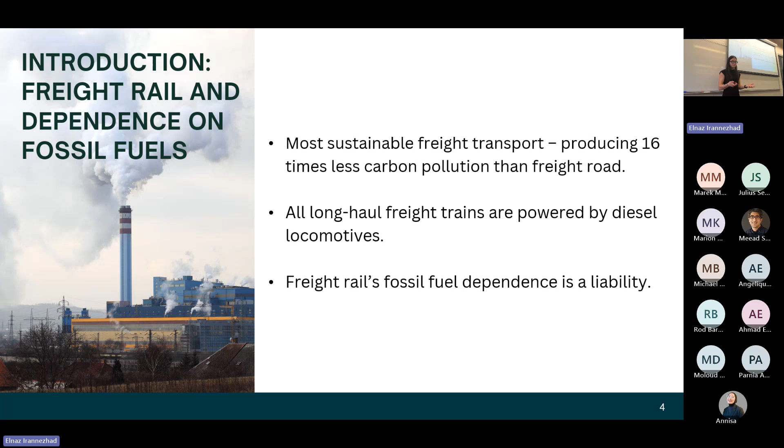And that is where battery electric freight rail comes in. However, just like your Teslas, battery electric freight rail must be charged along its journey. We need to create infrastructure along its route to allow the batteries to be charged or to be swapped. But how exactly do we do this in a feasible way? So this is basically the crux of my thesis.

And in order to answer this question of how do we create these stations in a feasible way, two things must be done. We first need to determine the energy required by the train to traverse along a particular route. So an energy consumption must be modeled. And then from that energy consumption model, we can provide that energy in an optimal way.

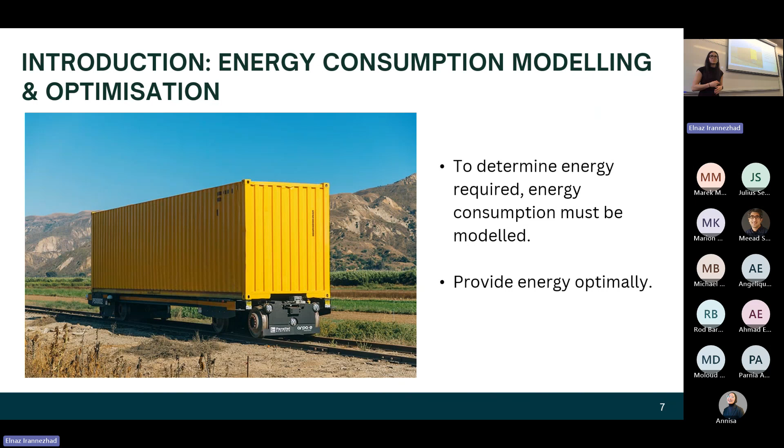So in order to develop this energy consumption model for my thesis, I analyzed three main energy consumption models currently in the literature. So these three main ones were the ones that I thoroughly looked at. All of them use the modified Davis equation, which is an equation that is, I guess, foundational for all energy consumption for trains. The first model looks at diesel trains and is validated on US data, and the second model uses an electric train and is also validated on US data. The third model, however, is slightly different. It does look at electric freight rail, but once again is validated against US freight data.

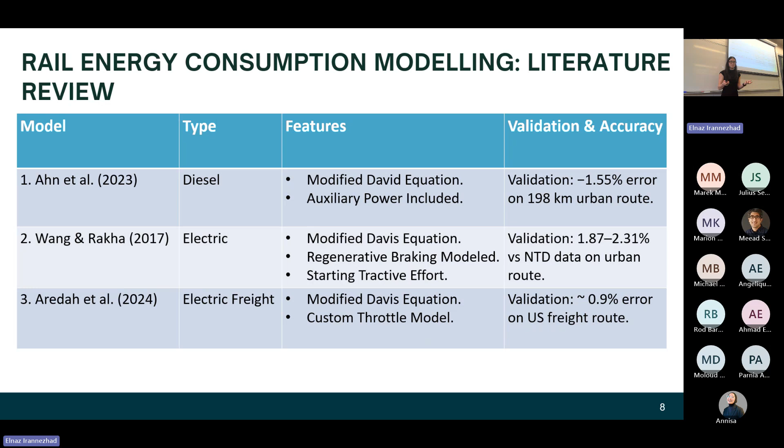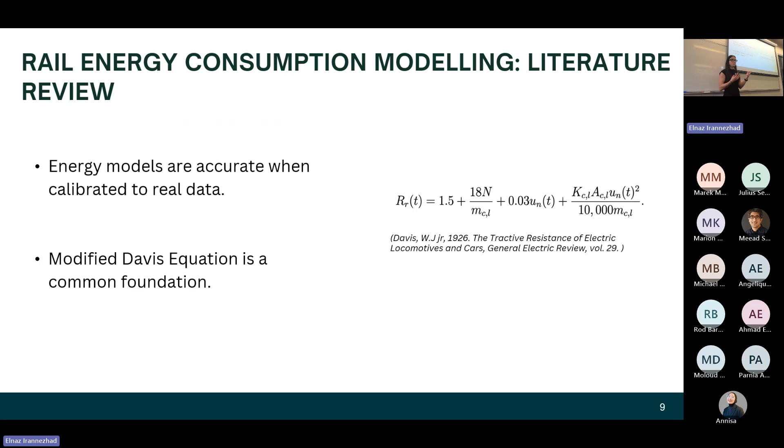However, although we have three relatively good energy consumption models, there is a gap in the literature, particularly when it comes to Australian freight electrification of rail. So the first thing, there is a lack of freight-specific battery electric modeling. The first two models didn't look at freight-specific rail. They looked at passenger trains, which have different energy consumption demands compared to freight rail. The third one, however, did look at electric freight rail. However, it used this customized throttle parameter, which limits its applicability to all different types of trains. That's an input that's quite difficult to find for every single train.

Secondly, there is very limited literature when it comes to focusing on how do we create charging infrastructure for battery electric freight trains. There seemed to be very, very little literature on that at all. And then finally, there were no energy consumption models that were tailored for Australian freight routes. And as one of the papers that I did read showed, variations in climate can really change the energy consumption demands of a train. So having a model that is tailored for Australian freight routes is really important, and that's something that we hope to close the gap on.

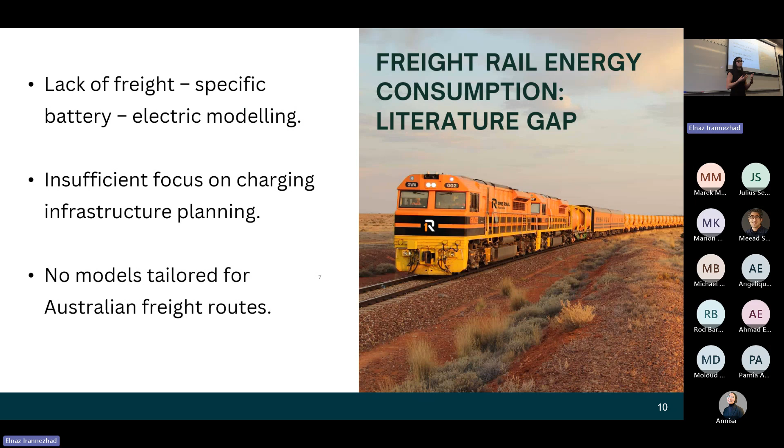So what does my thesis hope to contribute? Well, first and foremost, I hope to contribute a battery electric freight-specific energy consumption model. And the output of this model will then be passed into an optimization algorithm that Dr. Jia Guo has created. With these two models built, my energy consumption model and the optimization model, they have been combined into a tool to help guide practical infrastructure planning and inform decision-making for charging and swapping of batteries.

Then my thesis looks at a case study demonstrating feasibility on a real Australian corridor, being the corridor from Sydney to Dubbo, for which Transport for New South Wales, a few months ago, very kindly gave us the data to help me do a case study for my thesis.

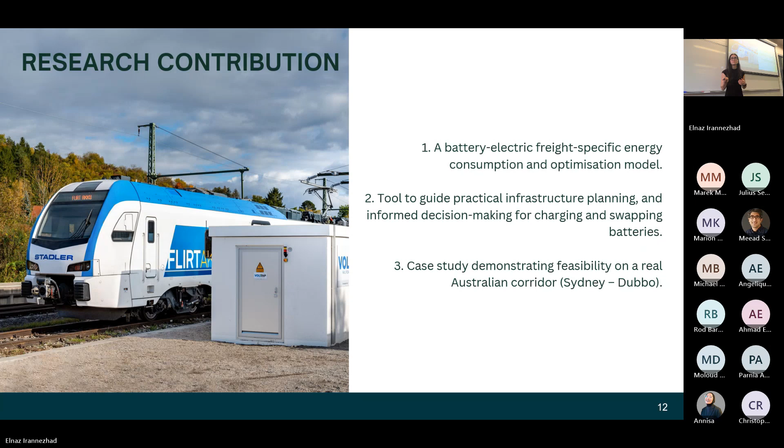So in order to develop my energy consumption model, I had to look at what the current literature had and what additional things I could create for this model. So everything highlighted in yellow here is the unique input parameters for my model.

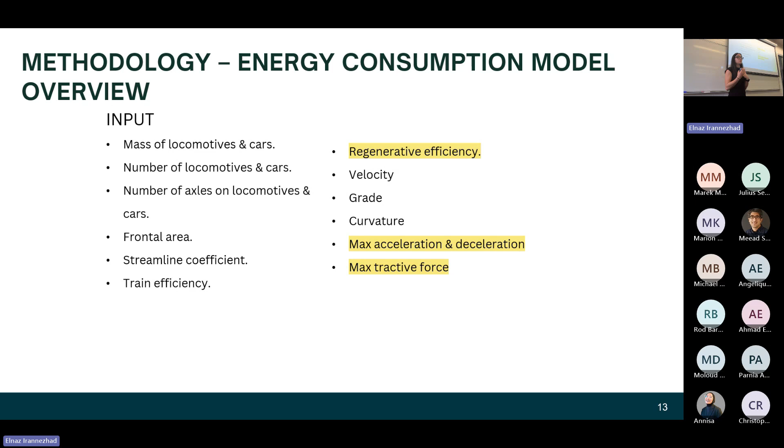So not all of the energy consumption models incorporated regenerative energy from braking for electric freight rail. And they also didn't take into consideration the maximum acceleration and deceleration of a train, which will vary from train to train. And they also did not take into account max tractive force. So these are 3 input parameters that are unique to my model. The rest, however, is built off of these 3 other energy consumption models.

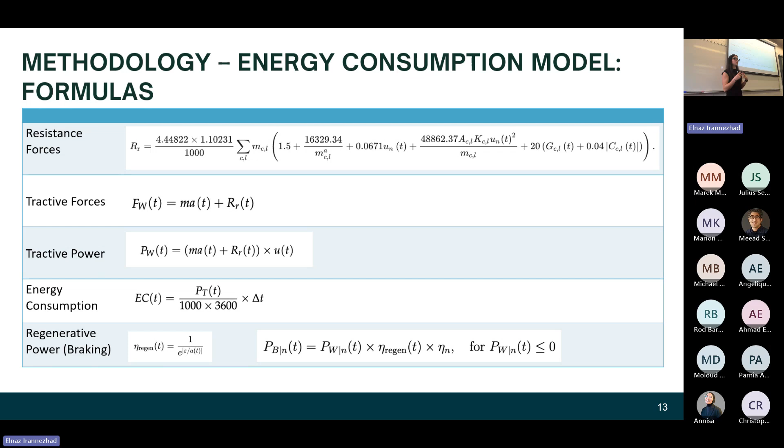So the unique aspect of my model is that almost all the data that we receive around the train and how it traverses is a function of distance. You know, at a particular distance or chainage on a route, this is the speed limit, this is the grade, and this is the curvature. But as you can see here, particularly the resistance forces are a function of time. So my model looks at converting these functions of distance to functions of time. And in order to do that, we need to calculate the acceleration, and then from the acceleration, we can find the velocity of the train.

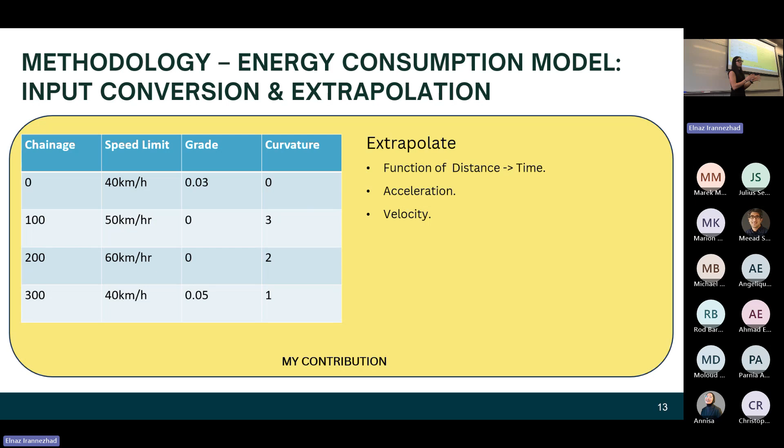So this is kind of the logic of my model. Iteratively, every single time step, the train first looks at what's the distance until I need to stop at a particular station. And based on the speed that the train is going at, and the maximum deceleration provided by the user, what is the required stopping distance to stop at a particular station?

So we have the stopping distance, and from there we go on to this next flowchart, where iteratively we have a look at, does the train need to start braking, or can we start accelerating or cruising at this particular speed? And iteratively through there, we can calculate the acceleration, or deceleration if it needs to brake at a particular station, or if it can just cruise and accelerate based on the maximum tractive force and the mass of the train. We can rearrange Newton's second law and find the acceleration of the train at a particular instance of time.

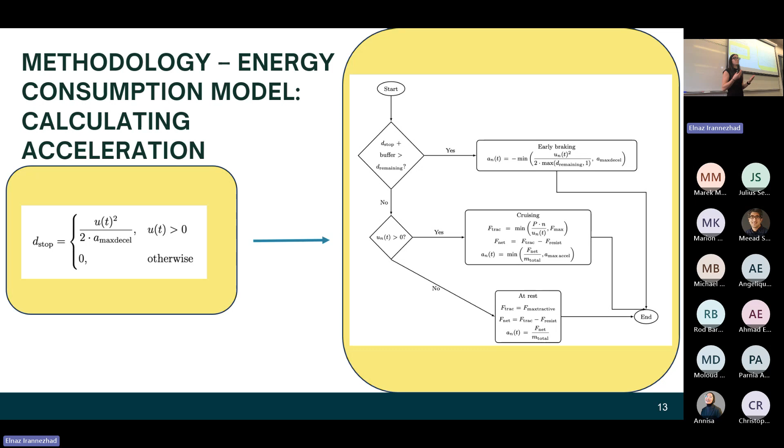So here is a summary of how I've converted the functions of space, particularly the speed limits, the grade, the curvature, from functions of distance to functions of time. And also how I've used velocity to convert distance as a function of time. So if we have the time, we can figure out the distance that the train is along the route, and then from there, we can convert the speed limit, grade, curvature from functions of distance to functions of time.

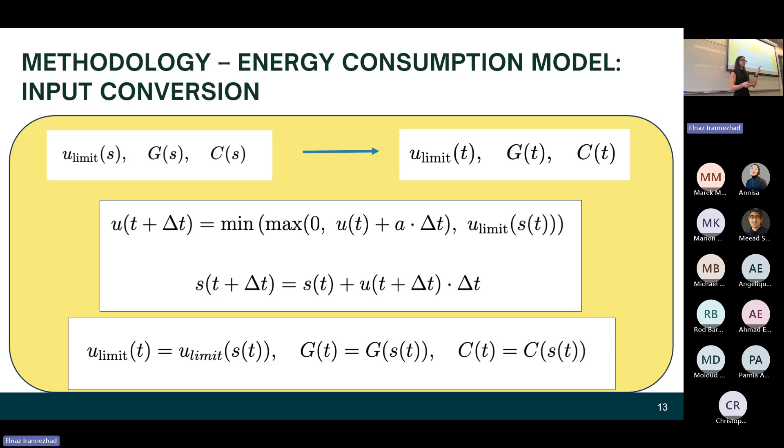So with my thesis, I did 2 case studies where I tried to compare how accurate my model was to validated energy consumption models that we saw in the literature review. So in case study 1, I looked at a flat, straight route that goes for about 5 kilometers. And these were the input values that I provided for my model, and it was model 1 that I compared this to, which is called a train sim. The highlighted values in yellow are the input parameters that are unique to my model.

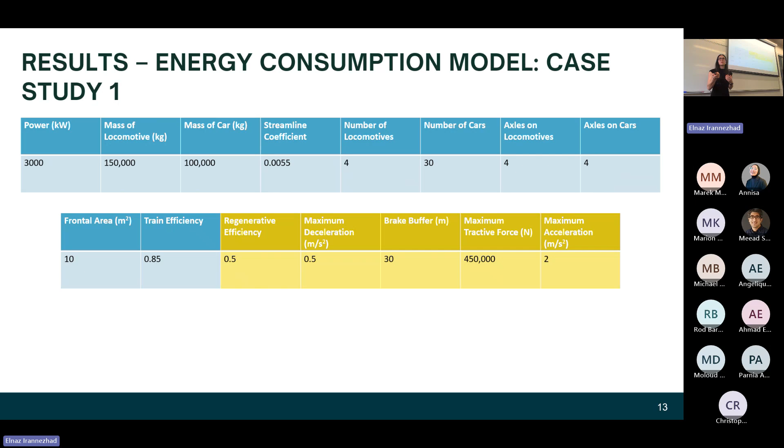Sorry, there's a bit of a typo. That should say case study 2. But in case study 2, I think the train characteristics that I provided for this case study are the exact same as case 1, as I've gone over before. But in this case, the route that it traverses is the same distance. However, there is a grade and there is curvature on this particular case study.

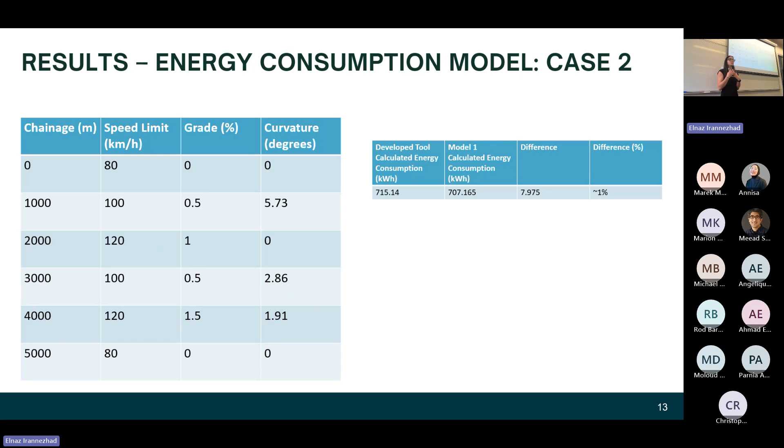Now, what was very exciting was my model calculated that the train would require about 715 kilowatt hours to traverse this particular route. And model 1 calculated very similar amounts of energy, about 707 kilowatt hours, with only a 1% difference between my model and their model, which was quite exciting.

So in summary, both models act in the way that we would expect. With more grade and more curvature, more energy is required for the train to traverse that particular route. But there is some difference between the model that I have developed and the results of model 1, particularly in case 1. There was about 34% difference, but very similar results for case study 2. And these would be attributed to my unique contribution from my thesis.

So that would be how I calculate acceleration and velocity, and how I take into account the maximum tractive force that the train can exert on the rails. We don't really know what model 1 does to calculate the acceleration and velocity of the train along the route. So that's probably where they arise.

However, this was a hypothetical route with a hypothetical train. So unless we have further real-world data, we can neither validate nor invalidate my model. So I guess further steps from here would just be more information, more real-world data on the routes and the types of trains that would be traversing these particular routes.

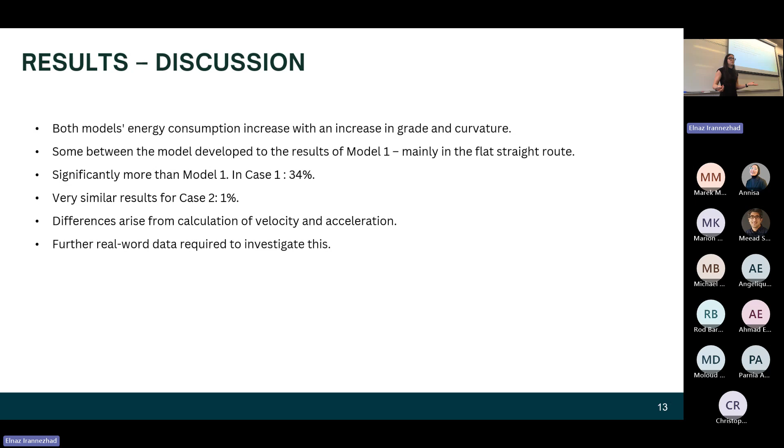Now with my energy consumption model explained, I will join you shortly again, but I will pass you over to Jia Guo to discuss how she came up with her optimization algorithm for the feasibility of charging stations. Okay, thank you, Sophia. Now I'm going to discuss the model. Before we dig into details, I would like to show you the motivations of our model.

As we know, battery electric trains can replace traditional diesel trains to transport goods from their origin to destination. This will create zero carbon emission, which is very sustainable and environmentally friendly. However, one problem is a battery can only support the train to travel a certain distance. After that, the battery has to be either charged or swapped.

And therefore, we need to decide to set up several charging or swapping stations along the route from the origin to the destination. When we are deciding the location and the number of stations along the route, one of our goals is to minimize the infrastructure setup cost. After the stations have already been set up, we also want to make efficient use of energy and charging time by providing a good charging and swapping schedule.

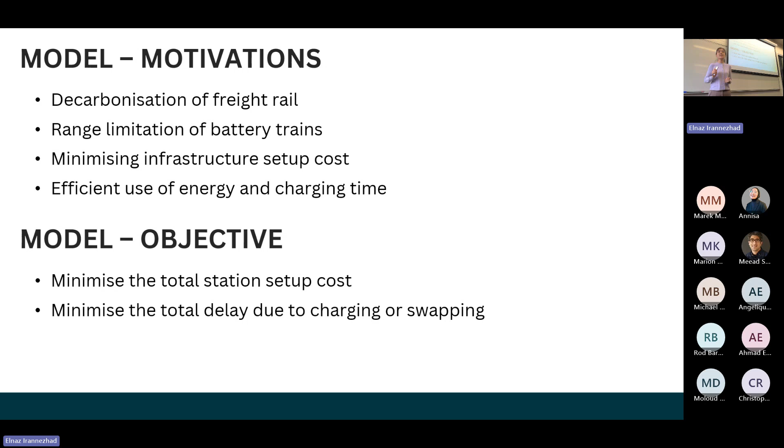Therefore, we can summarize two objective terms from the motivations. First, we want to minimize the total station setup cost. Second, we want to minimize the total delay due to charging or swapping.

Then I'm going to show you the operational mechanism of the station. Suppose the train will start from the origin and drive along the route all the way to the destination. And there are several potential locations where we can establish the station. Let's say we have locations 1, 2, 3, and 4.

Suppose we decide to deploy station 2. Station 2 can be used to charge or swap batteries. And here's how station 2 operates. The train, which carries one or multiple batteries, starts from the origin, and it arrives at station 2, which is already deployed. When the train has arrived at station 2, the SOC is already very low.

By saying SOC, I mean the state of charge, which is the percentage of energy in the battery. So SOC is always a value between 0% and 100%. 0% means the battery is totally depleted. 100% means the battery is fully charged. When the train has arrived at station 2, the state of charge is already very low. Then it has 3 options, and the train has to choose exactly one from the 3 options.

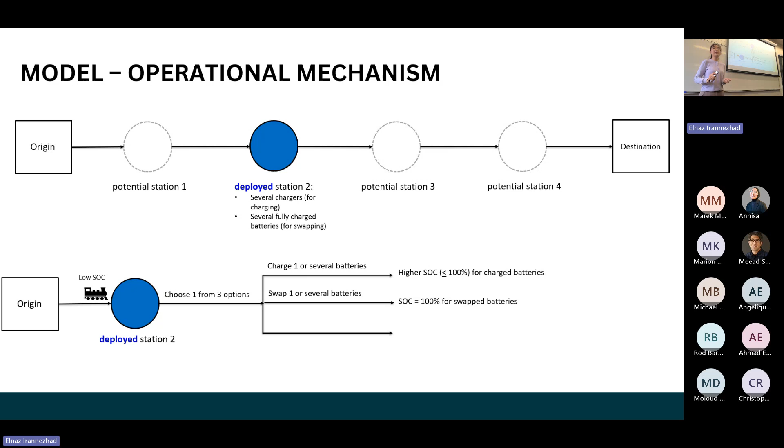In option 1, it can choose to charge one or several batteries. By the end of that, the charged batteries will have higher SOC. Remember, we don't need to charge all the batteries to 100%. In the second option, we can swap one or several batteries. By the end of that, the swapped batteries will have SOC of 100%. Option 3, we choose to do nothing. Then, when we leave the station, the SOC are unchanged for all batteries. When we have chosen the option and used the option, the train can leave the station and head to the destination.

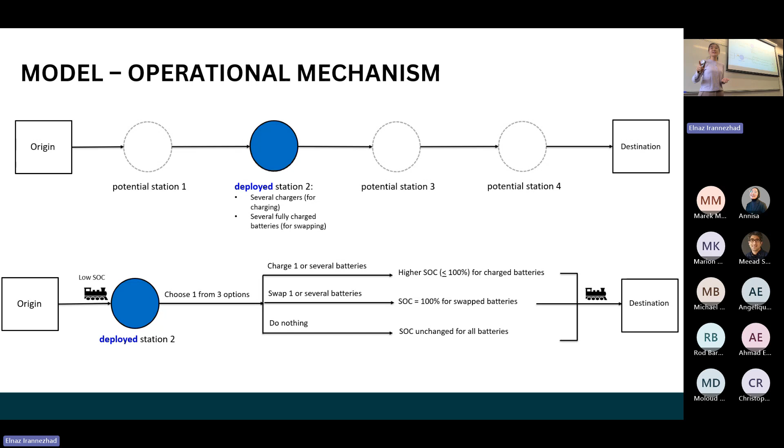Okay, then we can summarize our decision variables from the operational mechanism. We have 3 groups of variables. First, we need to decide whether to deploy a potential station or not. Second, for each train, we need to decide the number of consists carrying batteries. We make this value a variable because we know the capacity of the train is really limited. If we assign too many batteries to a train, there won't be enough space for cargoes.

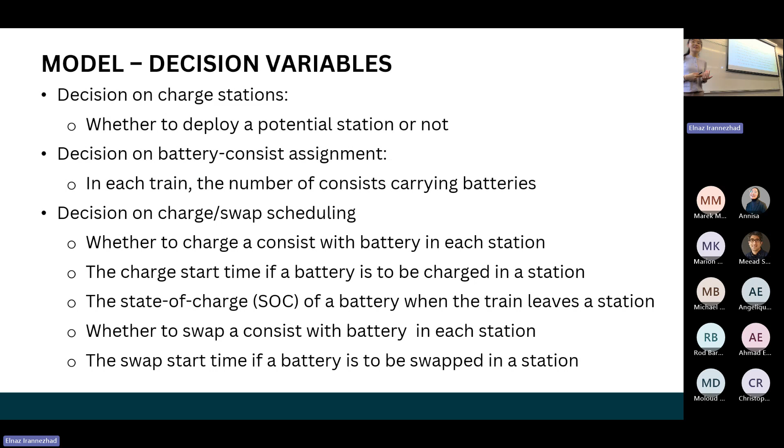The third decision is on charge swap scheduling. That means when a train has arrived at the station, we need to choose whether to charge batteries, swap batteries, or do nothing in that station. If we choose to charge the batteries, we need to decide when to start charging the battery and to what state of charge a battery when the train leaves the station. If we choose to swap batteries of the train, then we need to decide the swapping start time of each battery.

Okay, then we have constraints. Basically, we have 3 groups of constraints. First, we need to make sure the charge stations must provide sufficient power for the trains to travel from origin to the destination. Second, we have requirement on the minimum carrying capacity of each train to ensure there's enough space for cargoes. Finally, we consider the capacity of each charge station. That means we include an upper limit on the number of chargers and an upper limit on the number of fully charged batteries.

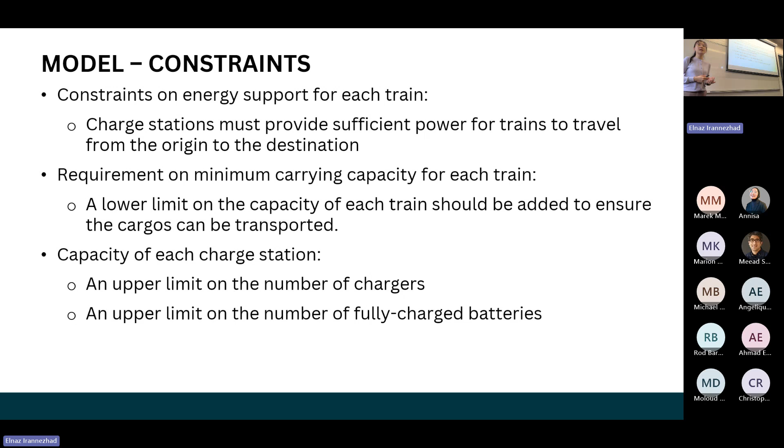Finally, I'm going to show you the assumptions we'll take into account. Most of the assumptions have already been discussed in the section of operational mechanism. I'm just going to emphasize the first 2. The first assumption means charging a battery takes much longer than swapping a battery. For example, swapping a battery might just take 2 hours. However, charging a battery from 0% SOC to 100% SOC might take up to 10 hours. The good thing is the user can always adjust those parameter values from the user interface developed by Sophia.

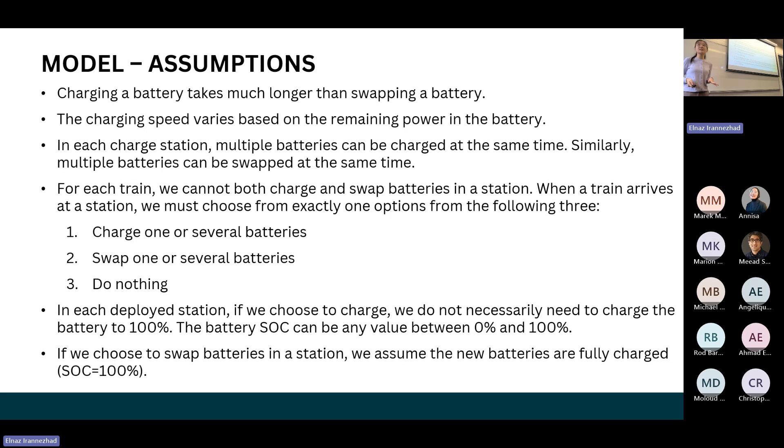Our second assumption is the charging speed is never a constant. It varies based on the remaining power in the battery. This can be reflected from our daily life. Suppose we're charging our cell phone. The charge speed is usually very high when the SOC is low. For example, if the SOC of our phone is only 5%, then it might just take a few minutes to charge it from 5% to 30%. However, if the SOC is already like 95%, then it might take really long to reach 100%. It is the same case as the batteries on the trains. Therefore, the charging speed is not always a constant. It can change based on the remaining power in the battery.

Next, I'm going to give time to Sophia. Sophia will discuss her case study and show her fabulous user interface.

Yeah, I'm back. So to incorporate my energy consumption model and Jia's optimization algorithm, we wanted to do this on a real world, real Australian corridor. And as I said before, Transport for New South Wales so kindly gave us real world data on the speed limits, the grades and the curvature from Sydney all the way through to Dubbo. So in this case study, we are imagining that we have a financial budget of $100 million.

So I guess you could think of it like, okay, let's construct charging stations along this route to support electric freight rail, but we only want to spend $100 million. Obviously, it'd probably be a bit more than that, but just for simplicity. And we're also going to say that we don't want to delay these trains along the route when they're charging by more than 100 hours.

Now, I will have to say that these values can be changed however you like in this model. These were just some nice round numbers that we decided to go with. And we also put weighting towards these two budgets. So I guess for us, time is a bit more important. So we gave it a weighting of 0.05 and the financial budget a weighting of 0.01. Once again, these can be changed.

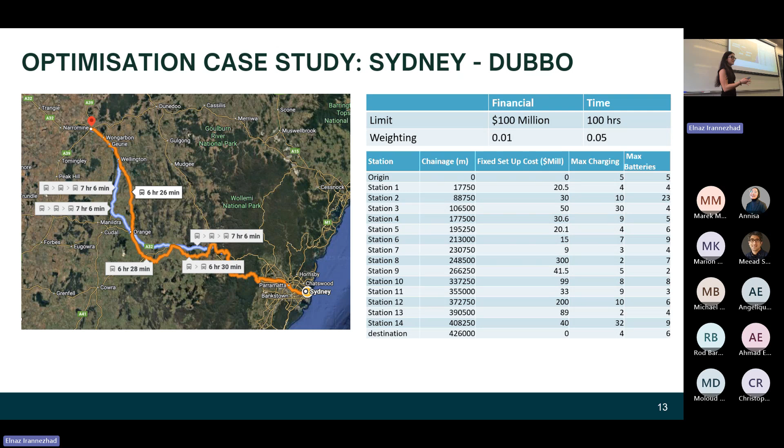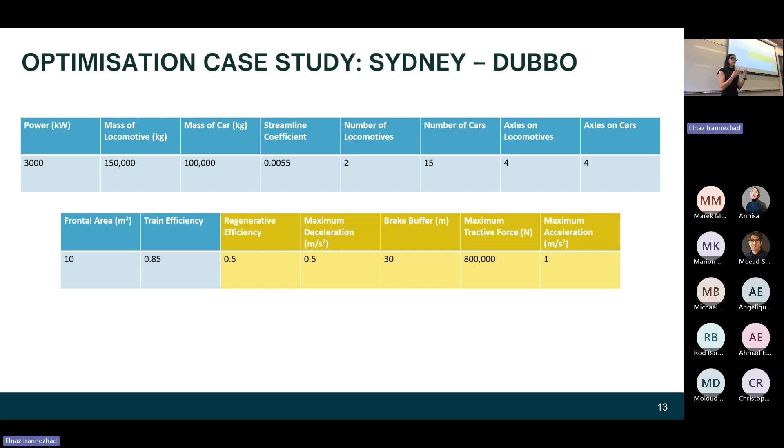So as you can see here, we've got our origin, which would be Central, and then our destination, which would be Dubbo. And then we have in between 14 different stations that the algorithm could choose to select for charging of this electric train. And here you have just a map of Sydney to Dubbo, if you don't know where it is. So for this particular case study, these were the train characteristics that were provided into my model to figure out the energy consumption of this particular train.

With that output, that was then given into Jia's model to select the most optimal charging station locations, but also for the sake of showing how good this optimization algorithm is, we also ran a worst case scenario, because this could potentially happen if you don't have any optimization model and you had someone just plan these stations however they like. Worst case scenario is that they pick the least optimal stations to be built and to charge these trains.

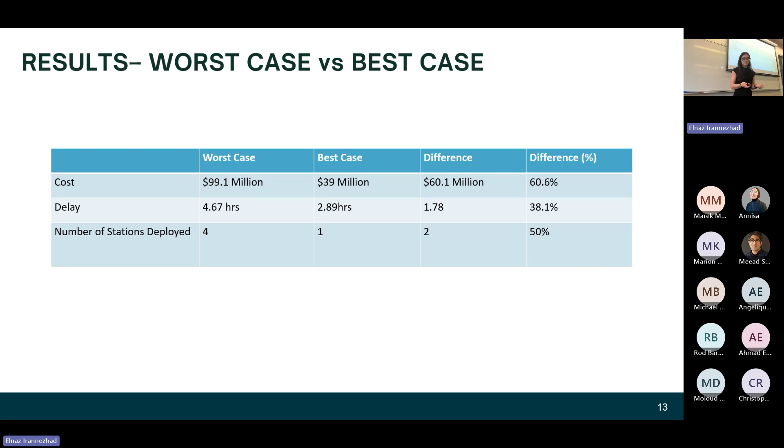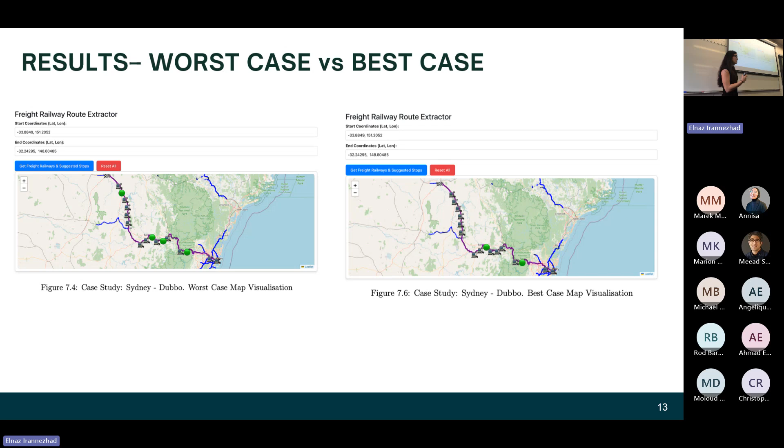So in the worst case scenario, you can see that there are about 4 dots. So 4 stations were deployed. On the other hand, in our best case scenario, you only see 2 green dots. So only 2 stations were deployed, and that's why the setup costs were much less. And whatever they chose to do at those stations minimized the time delay.

So in conclusion, the developed energy consumption model does vary slightly, with case study 1 showing that there were slight variations, and then case study 2 showing really similar results to model 1. And those differences arise from the variations in acceleration and velocity that I have attributed it to.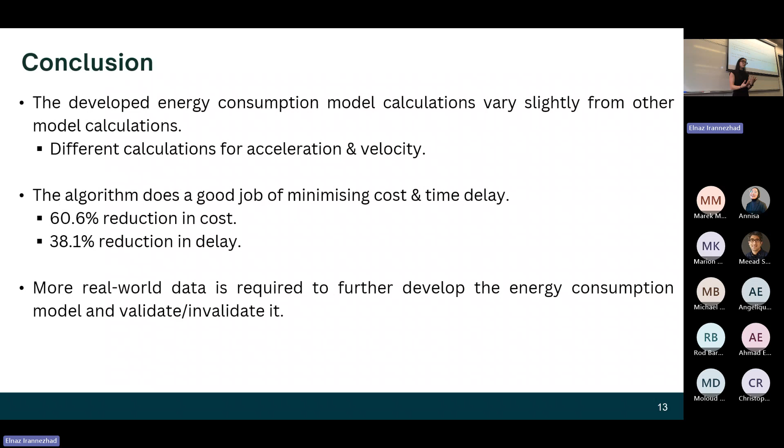Also, in conclusion, we can see that the algorithm does a really good job of reducing cost and reducing time delay. As I said before, a 60-ish% reduction in cost and a 38% reduction in time delay. But as I said before, we require some more real-world data to further validate my model or calibrate it correctly, and then also further show the feasibility of this optimization algorithm.

We do have time because I'm not time constrained, so I have to show it from here, don't I?

I will run you through what it would be like to use my tool. So just another summary of what the tool is. This is a user interface where I would say it's quite simple and easy to use. The user will just have to import train characteristics for that electric freight route, input the route characteristics through an Excel file, which again is very quick and easy, and then also input the potential charging stations that they would like to select. Then they just need to press a button.

It will run this optimization, firstly the energy consumption model, and show a matrix of the energy consumption and the time delay. Then they press another button, and that will show what would be the recommended action at each station, which station should be deployed, and must the batteries of the trains be charged or swapped. And then it also outputs this in a nice visual way on a map. So I'll run through that with you using this tool.

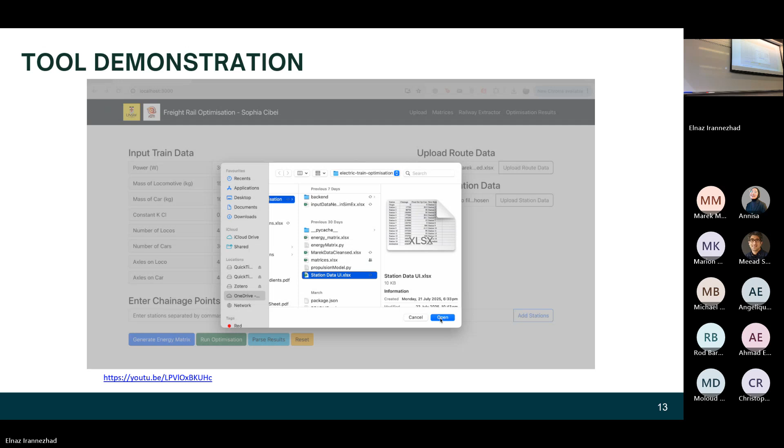Okay. So here you can see I've inputted all the data for this particular train. I might just stop here. So previously here, I've just inputted the power of each locomotive, the mass of the locomotives and the cars, and all these other parameters that are required for my energy consumption model. Once that's done, you can come over here and input your data for the route. So here I'm putting in the Sydney to Dubbo route information, and I'm also inputting the possible stations that we could select along this route.

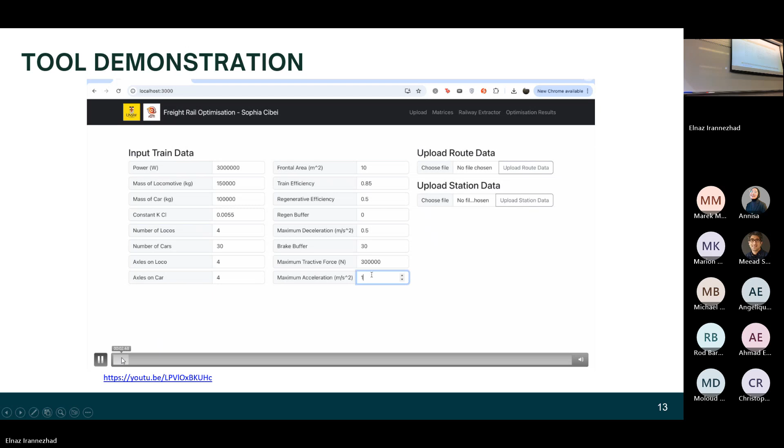So here you can see all of them, it started from the beginning. I'll let it do its thing. So here you'll see all the different chainages where the different stations could be. And then here also you have the maximum number of batteries that can be charged simultaneously and the maximum number of batteries that can be swapped simultaneously.

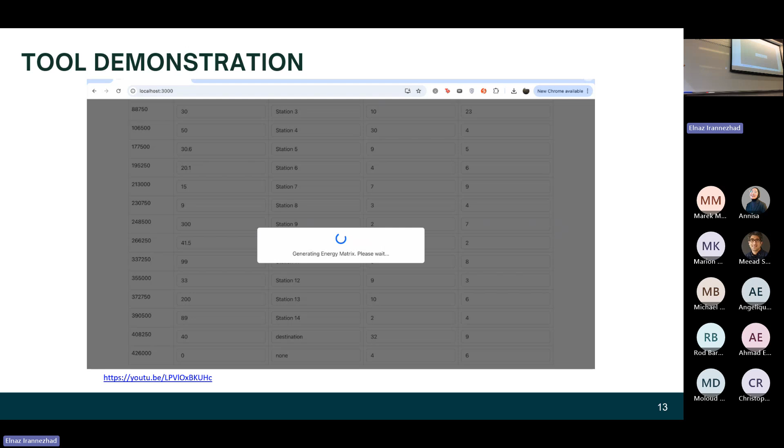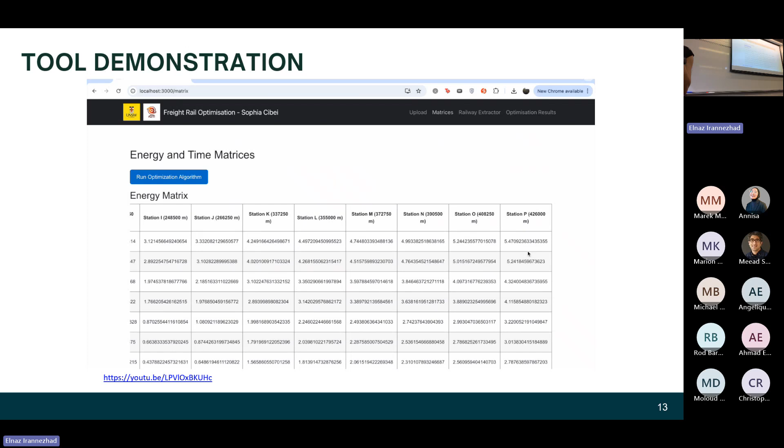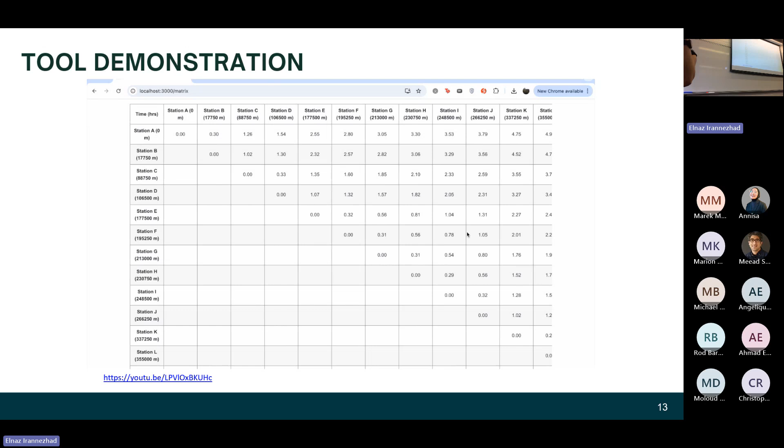Here I'm generating the energy matrix for this particular route with these provided potential stations. So you'll just go to a different tab and you will see all the different energy consumptions in terms of batteries to go from the origin station to the destination station. And here you also have the time matrix, so how long it takes to go from every single station pair. So with that done, those outputs are fed into Jia's optimization algorithm model.

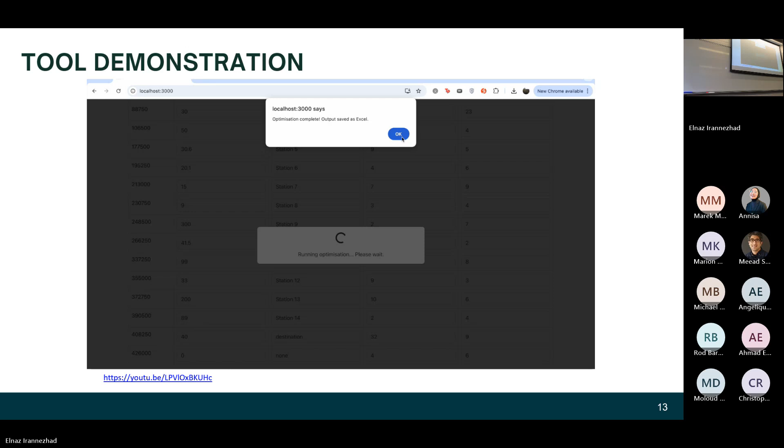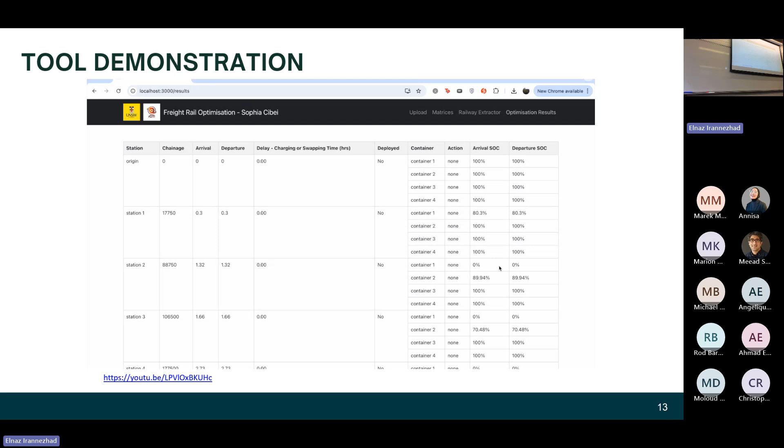We see here if the station should be deployed or not. And then for each of the batteries on the train, we can see the action at each station, but also the arrival state of charge and the departure state of charge. So this table summarizes all the different actions for every single station along this route. So as you can see here, for the optimal case, station 7 is recommended to be deployed, and they're recommending that you swap 3 of the batteries, and then you continue along the route.

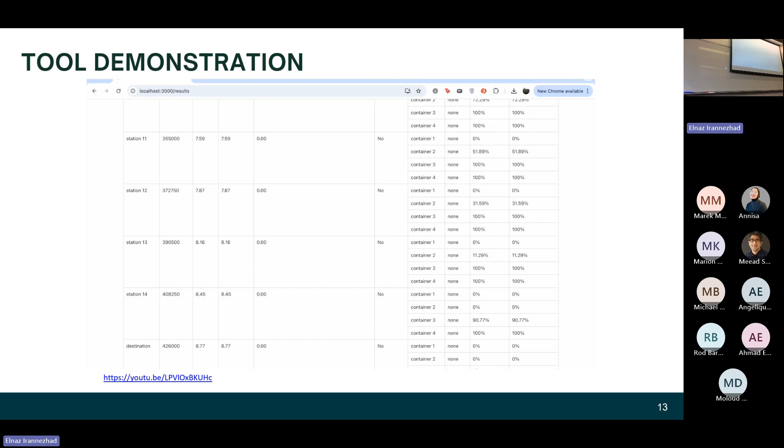And then I think in this particular case that I went through, no other stations were deployed. This isn't the same case study as the one I've introduced earlier. So then what you can do is input the start and end coordinates of your train stations. So here we've got our starting station, which you can see the icon being Sydney, and then the destination station being Dubbo, and you'll see as I zoom out a little flag to show that this is the destination station.

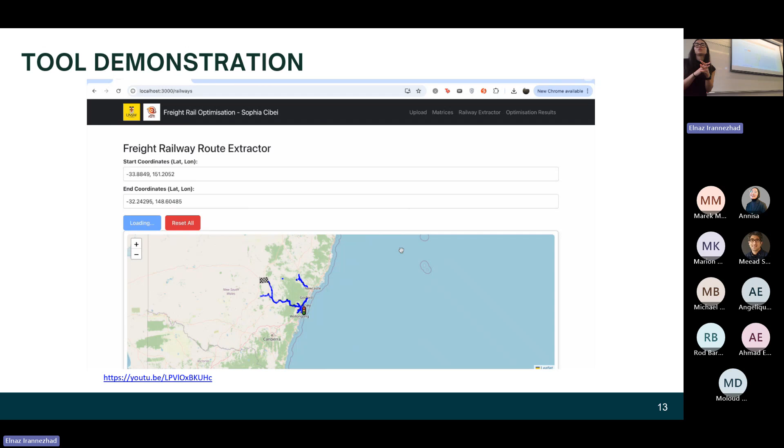And then we run more code to show the possible routes that could be taken, and then the route that is taken, the possible charging stations to be selected, and then finally the charging station that is selected. So as you go along the purple line, you can see that's the route the train will take. The different icons here are all the potential stations you could pick, but the green circle is the location of the station that is recommended to be deployed.

And as you hover over each of these stations, it will tell you more information. So station 7 we knew is deployed. Oh, I'm sorry. Let me go here.

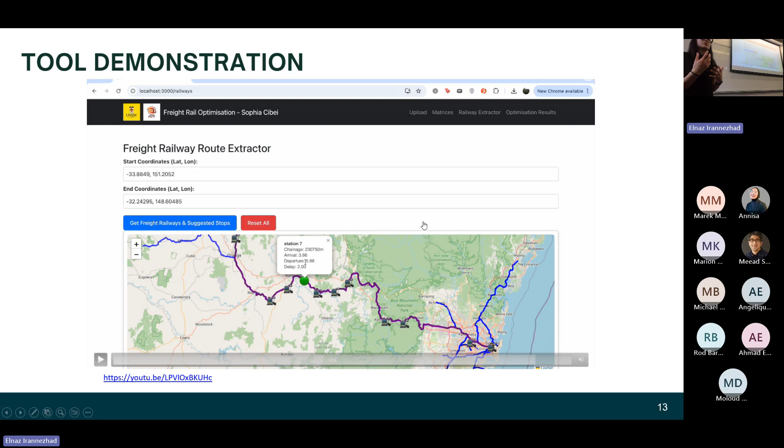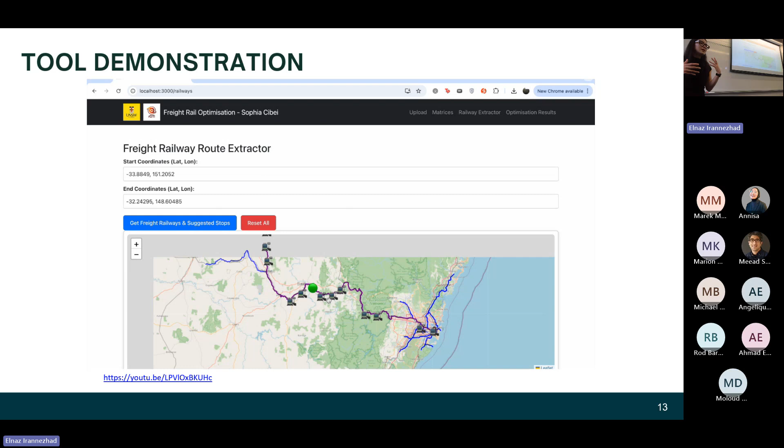So here we can see that station 7 is at this particular chainage. The train arrives at 3.6-ish hours, and then there is a delay of 2 hours because the batteries are being swapped. So then it departs the station after 5.66 hours. So we can also hover and get more information about that train. I think this just shows it in a nice way, not just in a table format. Yeah, that's my tool. That was my presentation.

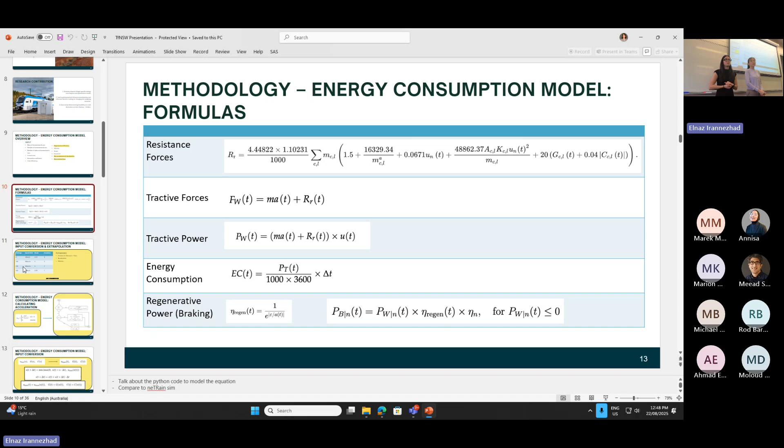And the last question, about the weighting system, because the summation wasn't equal to 1. Why did you choose, for example, 0.01 and 0.05? How did you come up with those weights? So for those, I'll hand it over to Jia to explain that a bit more.

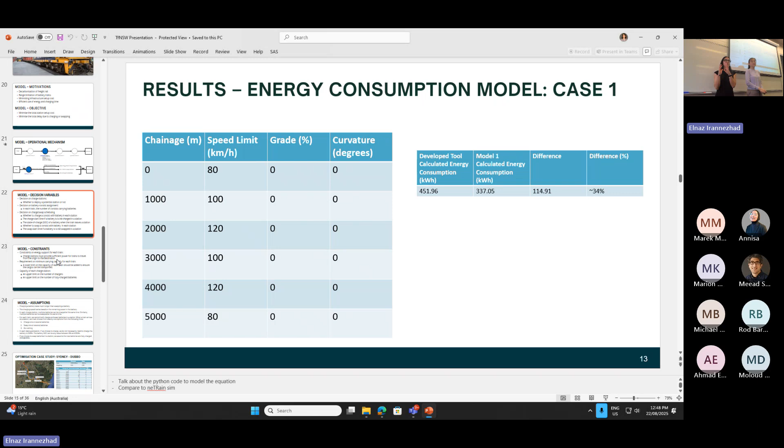But the 0.01 weighting for financial cost, and 0.05 weighting for time delay, those were just selected. It was made up. We assumed, like a lot of the data here around the stations, fixed setup costs. Oh, okay. So basically, if you weight it more, you're saying that is more important to you, because the idea is to minimize that optimization.

Yeah, but in the weighting system, we usually go with weights whose summation equals 1. So we have two terms, right? Usually the term for delay is alpha, and the other one is 1 minus alpha. How do we decide alpha? Usually we try to transfer delay to an amount of cost from the delay. That makes sense. And that can be compared with the setup cost.

Questions, and Michael from DP World. So Michael also asked, are you going to compare with the base example of a diesel locomotive today, as we need to compare between liters of diesel to kilowatt hour for a business model? And I think you kind of partially answered that already. Yeah, that was a similar question. Sorry, I just realized you probably can't hear the question.

So a very similar question was around, did we compare diesel versus electric freight rail? And my answer was, for the focus of my thesis, no, it was around how do we optimally select charging stations for an electric freight rail. So we assume that electrification is the better way to go. However, as I did say, there was a tool that I used that can provide me with the energy consumption for a diesel freight rail.